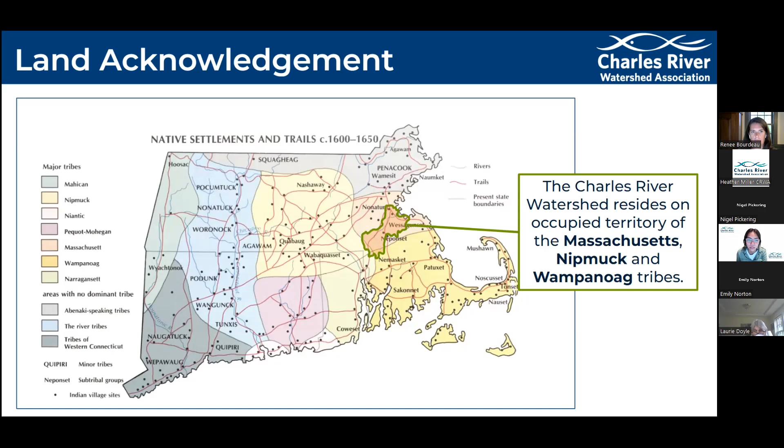Just a quick overview of our agenda. We'll be covering background on our organization and the I-90 project. Then GeoSyntec will be presenting on the flooding and environmental impacts analysis for each of the alternatives presented in the NPC. We'll end with a Q&A and how you can submit comments to MassDOT by next week's deadline.

For tonight, your presenters: you will have me. My name is Deirdre Haniff. I am Charles River Watershed Association's Urban Resilience Advocate. I have a bachelor's and master's degree in environmental science and specifically have done research in the field of freshwater toxicology.

Our second speaker from GeoSyntec is Renee Bourdeau. She is the senior engineer with GeoSyntec, a registered professional civil engineer with 16 years of experience in watershed and municipal planning and design, as well as land use master planning, environmental permitting, and design of stormwater management controls, with a focus on low impact development and green infrastructure techniques.

A little background on us. Charles River Watershed Association is one of the oldest watershed organizations in the country. We were founded in 1965 by a group of residents who did not accept that the Charles cannot be cleaned up. Since then, we have worked with federal, state, and local governments to protect, restore, and enhance the Charles River and its watershed through science, advocacy, and the law.

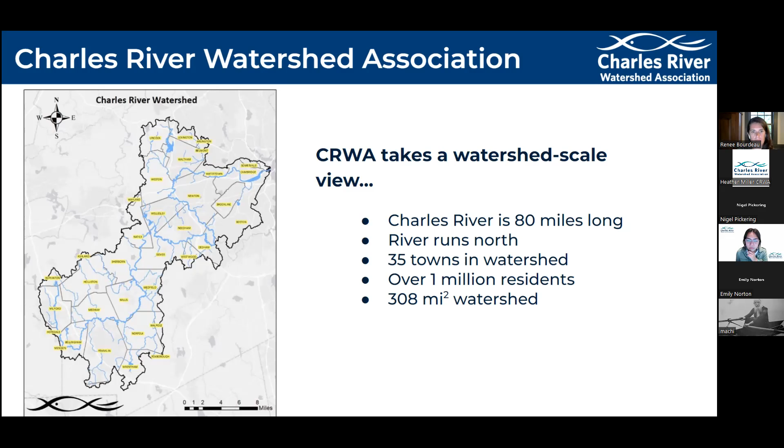Next slide. Our organization has had a long history of advocacy and projects within the watershed that supports our mission. For people in Boston, you might be aware of our advocacy during the Big Dig that led to the Zakim Bridge design. We started a flagging program which notifies boaters and recreational users in the river of the water quality for the day.

We were involved in creation of the biggest wetlands in the watershed, called the Natural Valley Storage Area. We've also been involved in the largest restoration project in Medfield and also launched a fish restoration program. All of this is just to show that we've come a long way since the dirty water days, but there is still a lot of work to be done.

On top of the development and a new commuter rail stop, any huge improvement to this area will be improved from what the current use of the land is.

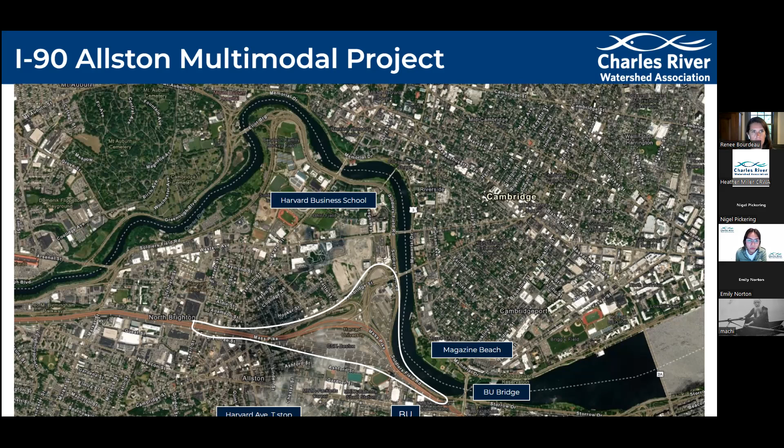A little background on what is currently the I-90 project area. Salt marshes and meadows historically buffered the Charles River, providing natural flood storage and control by storing excess water volume and also helping to filter out nutrients and pollutants. Where the water used to be in this area foreshadows some of what we'll be talking about tonight, because water is returning to the spaces it used to be in.

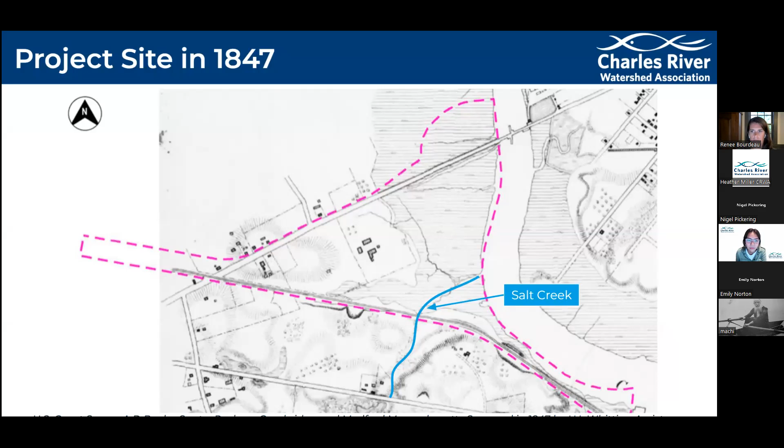That's because in developed landscapes you have a lot more impervious surfaces, your hard surfaces like rooftops, roads and buildings, that basically act like a rain jacket in our environment. This reduces the amount of green space and ground cover for water to infiltrate back into the ground, and it exacerbates stormwater runoff and flooding, which can lower water quality in the river and prevent safe recreational activities there.

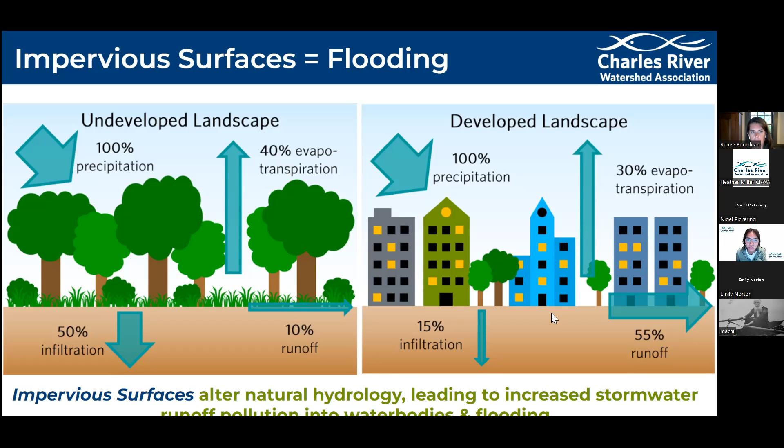As you can see today, the marshes that used to store floodwater and buffer tides at the project site are now totally impervious roadways. I've also highlighted in that project site area, in yellow, what is called the throat area, and this is what the alternatives of the project and today's presentation will focus on.

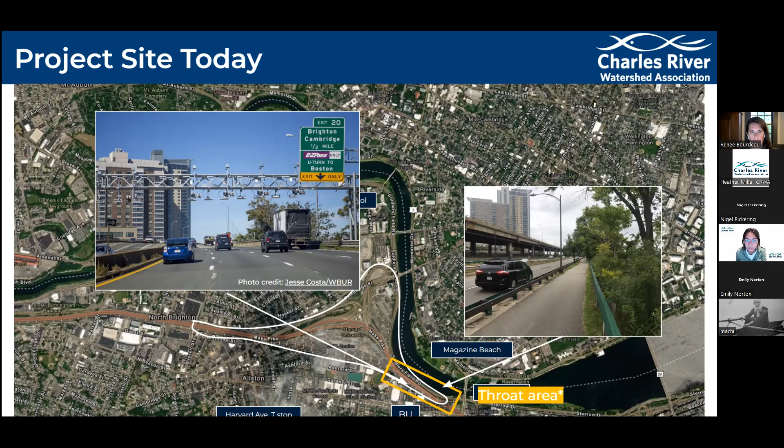While we will mainly be focusing on climate vulnerability related to flooding, impervious surfaces do more than just increase runoff and flooding. They can also create an urban heat island effect, which you can see as pockets of red on the map in the neighborhood, a result of high percent of impervious surfaces and a lack of trees and green space. So although we will be focusing on flooding, we recognize this community is also experiencing other impacts of climate change.

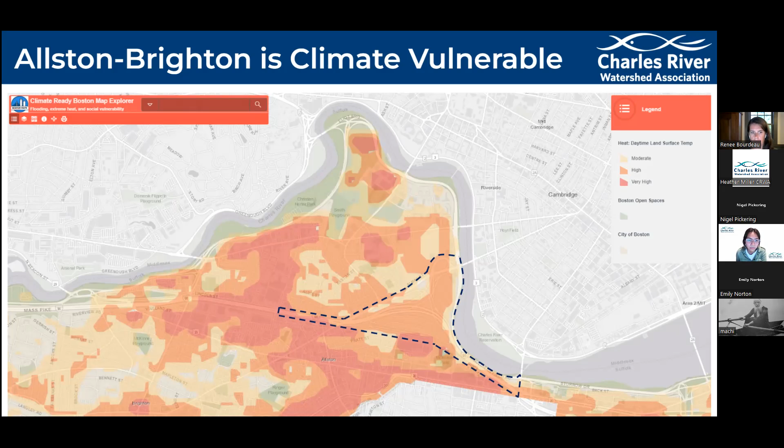We also want to acknowledge that the community is incredibly diverse. It is an environmental justice community with many socially vulnerable groups. This neighborhood currently lives with the construction of the Mass Pike and Soldiers Field Road, which have disconnected the community from the river. So improving connectivity is, and should be, an important conversation in this project.

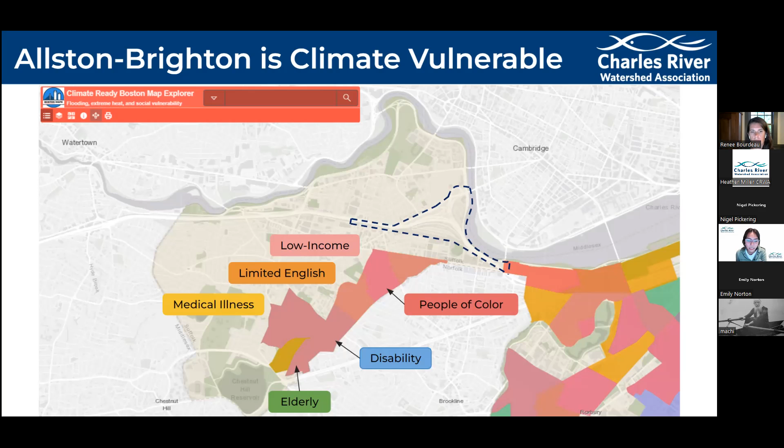The current conditions of the project site, specifically near the throat area, currently has bank erosion where the bike path is. There's trash flowing and flying towards the riverbank and clogging some of the pipes there. There is also currently low connectivity for pedestrians, bikers, and residents from the Allston-Brighton neighborhood to safely and easily make their way towards the river.

For us, what's really important to highlight is there's currently no stormwater treatment at the site. So right now we have an opportunity to turn this into a transformative site that will restore river health, improve connectivity, and make the river and parklands more accessible and resilient to extreme storms.

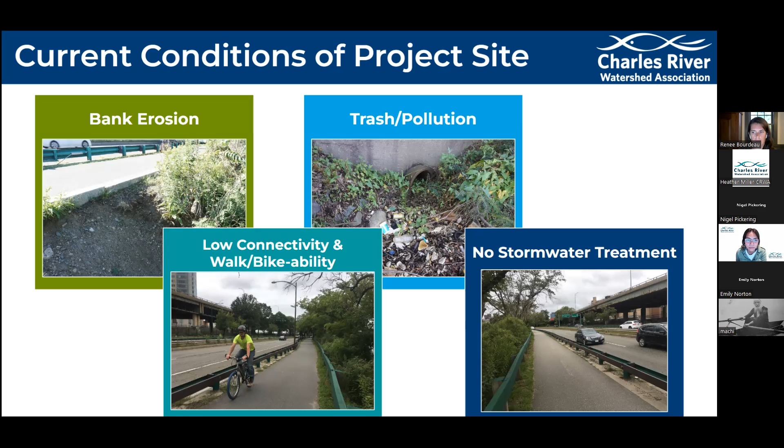Within the past 8 years, CRWA has been involved in the project. We have been members of the I-90 task force since the beginning in 2014, when MassDOT said their preferred design required putting a temporary road in the Charles for 8 to 10 years. We, alongside the boating community and other advocacy groups, said no way. We did not just spend decades and nearly $1 billion cleaning up the Charles to then stick a road into it. So we led this No Road in the River campaign and continue to advocate for a design that does not degrade the health of the river.

As we think about this project, and as you listen to the rest of the presentation, one of the things we want to stress is that this project has been going on for 8 years. It started in 2014 when MassDOT presented the current infrastructure and stated that it needs to be fixed. We're currently still very far away from a completed project. MassDOT still has other state and federal environmental review, permitting, and design to go through, plus the actual construction period, which might be completed in 2030, maybe 2035. We don't really know at this point. And the project timeline keeps getting extended.

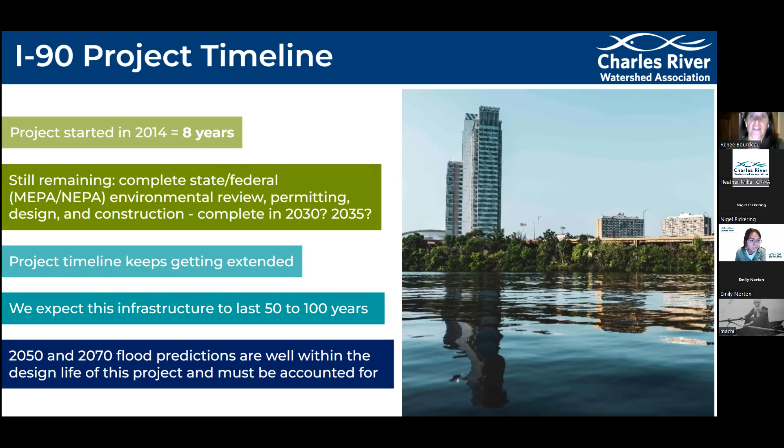As Dira mentioned, there are three design options for the throat area that MassDOT has proposed, which we're going to discuss today. I'll go into greater detail on each of these throat options on the coming slides. The first option in the top left is a modified highway viaduct. The next one is a modified at grade, and the final one is the Soldiers Field Road hybrid.

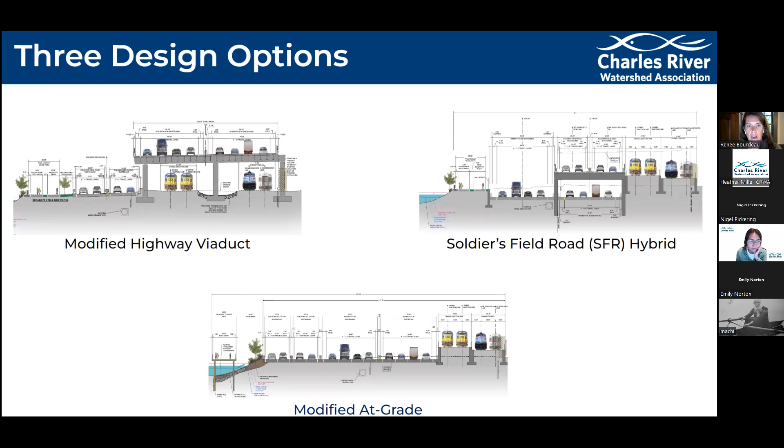The modified highway viaduct is shown here in a cross section that comes directly from the Notice of Project Change. It includes a new I-90 elevated structure to replace the existing I-90 viaduct structure, while all other transportation infrastructure remains at grade, similar to what is currently there now.

MassDOT recently made changes to the design to include a narrower viaduct, which opened up additional open space along the Charles River within the throat area. The Paul Dudley White path would provide 10-foot wide separated bike and pedestrian facilities within a majority of the throat area, and a minimum 12-foot cross section where separated facilities cannot be provided.

This option allows for pedestrian and bike connection from the Allston-Brighton, Brookline, and Boston University neighborhoods to the Charles River Reservation. The Worcester Main Line and the Grand Junction rail tracks would remain at grade, similar to their existing horizontal alignment, with extensions of the Grand Junction rail line into West Station.

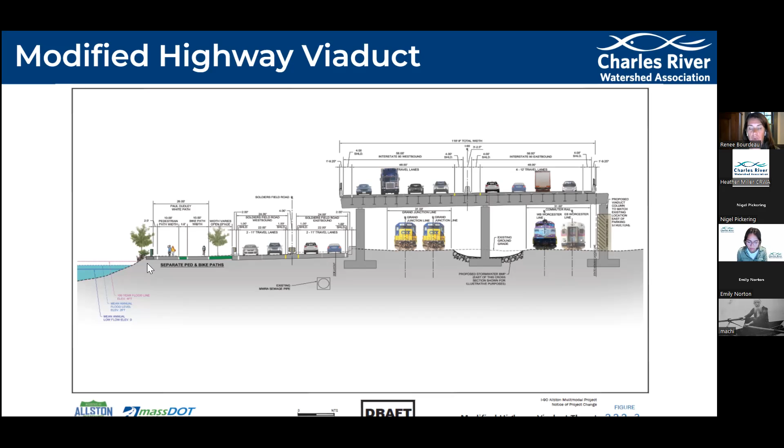The existing Grand Junction bridge over Soldiers Field Road will remain unimpacted, and the MBTA commuter rail lines would remain adjacent to the existing right-of-way line, with Boston University property to the south. Next slide.

The next option we call the modified at grade option. This is an at-grade design which proposes to reconstruct I-90 at grade or below grade to eliminate the viaduct and retain all other transportation infrastructure at grade, with the exception of a short length of Grand Junction rail track as it passes over I-90 and Soldiers Field Road after raising in elevation in a parallel alignment.

The modified at grade option allows for pedestrian and bicycle connection from neighborhoods in Allston-Brighton, Brookline, and BU to the Charles River Reservation. The Paul Dudley White path would be 20 feet wide on a boardwalk structure over the Charles River in the throat area.

Design as a modified at grade improves the visual quality for the neighborhood beyond existing conditions by removal of the visual barrier of the viaduct and providing enhanced neighborhood views. The Federal Highway Administration, or FHWA, has raised concern with this option, which we'll talk about later in the presentation, where a section of I-90 is within the 50-year rainfall floodplain, and during that 50-year rainfall event a section of this would potentially flood. So they've raised concern with that.

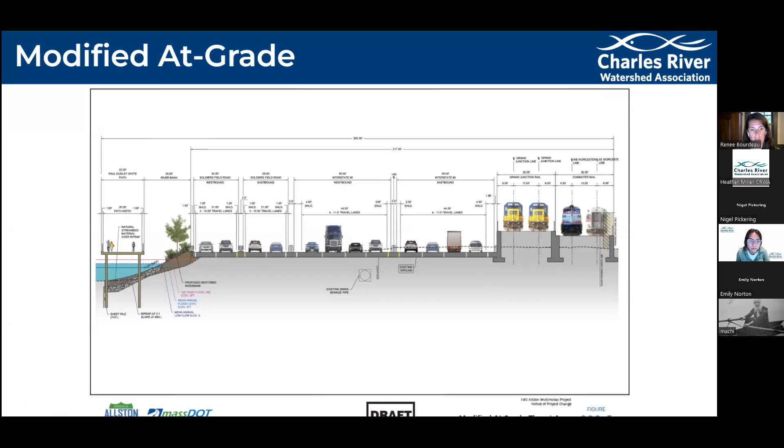The last option is a Soldiers Field Road hybrid, which we'll refer to as the SFR hybrid. It proposes to stack Soldiers Field Road above an at-grade, below-grade four-lane section of the I-90 eastbound travel lanes and shoulders. This hybrid option allows for a bicycle and pedestrian connection from neighborhoods in Allston, Brighton, Brookline, and BU to the Charles River Reservation.

The Paul Dudley White path would remain at grade, providing separate paths for bicycle and pedestrian uses. Each path would be approximately 10 feet wide, with a 4-foot wide buffer between the pedestrian and bicycle path. This option opens up almost 20 feet of new park space adjacent to the Charles River.

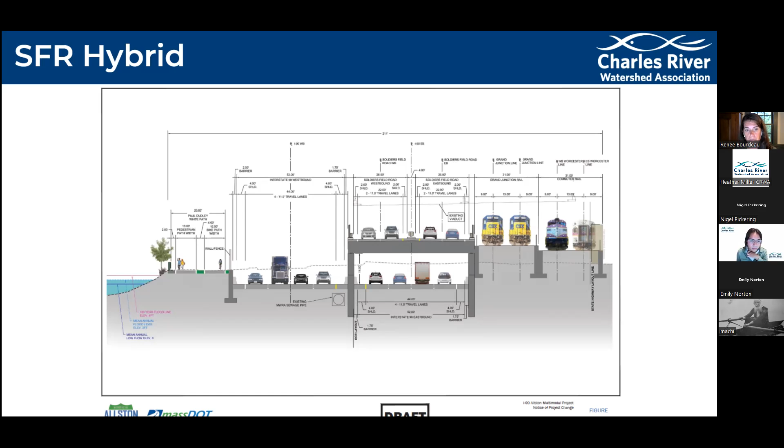Construction for this option is estimated to be the longest, at approximately 8 to 9 years, and construction staging of this option would require relocation of Soldiers Field Road and the Paul Dudley White Path over the Charles River, resulting in construction duration impacts to the Charles River, which we'll get into a little bit as we move forward here. Next slide.

These resources include online viewers regarding future sea level rise and coastal flooding predictions. We reviewed technical memorandums and reports prepared by the MassDOT team on the project, looked at MassDOT GIS for transportation, and ultimately relied heavily on the most recent document, published in July 2022, a notice of project change, including all appendices. We'll describe a lot of technical content in the coming slides, most of which is available within the notice of project change on the project website.

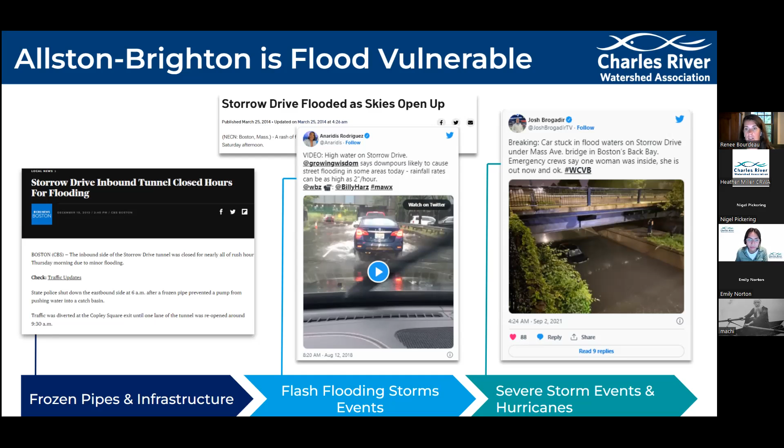Infrastructure projects like this don't come around very often. The existing viaduct was built in the 1960s, and for the past 20 years MassDOT has been talking about replacing it—that's going on 62 years. Most new highway bridges and infrastructure have a lifespan of 50 to 100 years, typically pushing the upper range of 75 to 100 years. So once this infrastructure is in place, it is here to stay and will likely see many of the future flooding impacts and climate vulnerabilities we're going to discuss today.

When we talk about flooding in the Charles River, many people simply say, well, we have the Charles River Dam, we don't need to worry about sea level rise impacts. Just a little history: the Charles River Dam was built by the U.S. Army Corps of Engineers in 1978 to replace the 1910 Charles River Dam upstream, now the site of the Boston Museum of Science. The dam controls the surface level of the river basin and its tributaries upstream, and prevents seawater from entering the Charles River Basin during high tides.

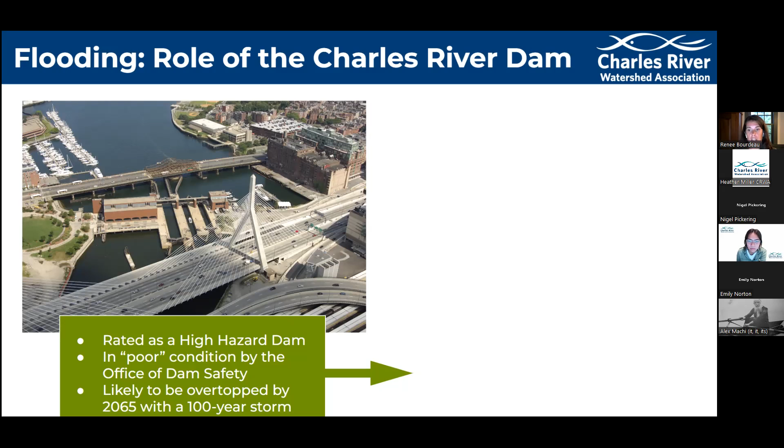Based on recent inspections, the dam is rated as a high hazard dam and in poor condition by the Office of Dam Safety. Based on recent projections and studies of coastal flooding impacts in Boston and Cambridge, the dam is likely to be overtopped by 2065 during the 100-year storm, and as soon as 2050 during the 500-year storm. The dam could be flanked as early as 2045—a mere 23 years away—under the 500-year storm, and in 2055 during the 100-year storm.

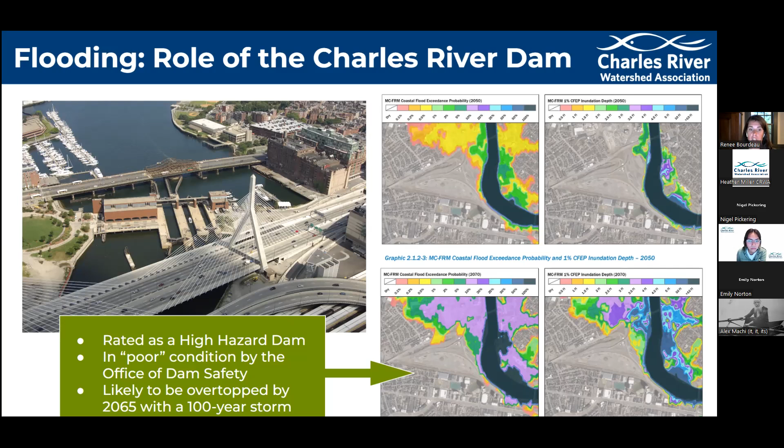All of these events are well within the 75 to 100-year lifespan of this infrastructure. Currently, the Army Corps of Engineers and Massachusetts Department of Conservation and Recreation are developing a study to assess the potential climate resiliency of the Charles River Dam. However, the results, timeline, and cost for implementation of such a project are all unknown.

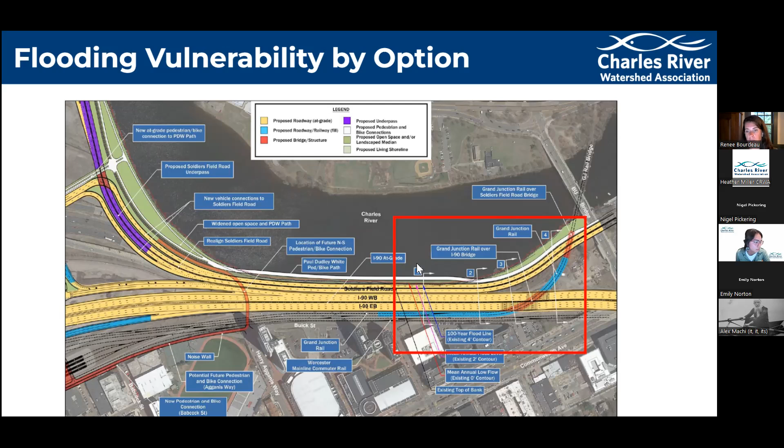Setting the stage for the next couple of slides: in the previous slide, Sarah showed you where the throat area was. In the red box here, we're going to focus on cross sections for each of the three alternatives. Section 1 is on the far left of the red box, and section 4 is on the far right, closest to the BU Bridge.

The Grand Junction Railroad and Worcester Main Line are also potentially vulnerable to flooding in 2050 and 2070, depending on the locations throughout that section. Under this build alternative, most of I-90 is not vulnerable to future flooding due to the elevated viaduct design. As we understand, this is still in conceptual design and final grading is not complete. The current layout is not expected to significantly mitigate future flooding in the northern portion of the project area, but the railways below the viaduct may provide some flood protection to the vulnerability of the BU campus, essentially acting as a wall.

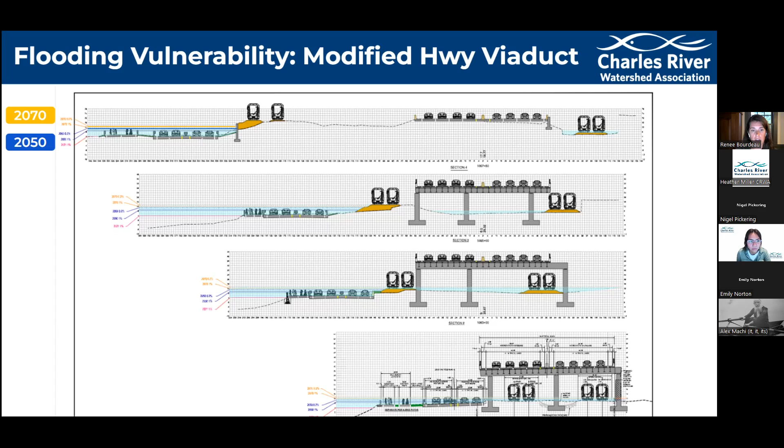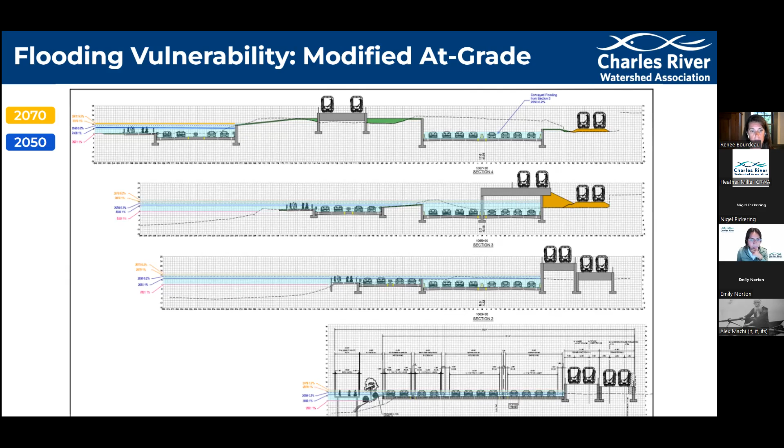Although I-90 on the eastern end is inland on an elevated landscape feature, there is potential for flooding in the western portion of I-90. In all cases, if the Charles River Dam were to be topped or overflanked, each of the throat options would have vulnerable structures and vehicular traffic underwater, making this infrastructure unusable in the future. In many of these options, we have to ask ourselves from a public safety standpoint, how does one evacuate Boston if all vehicular and train traffic lanes are inundated with water?

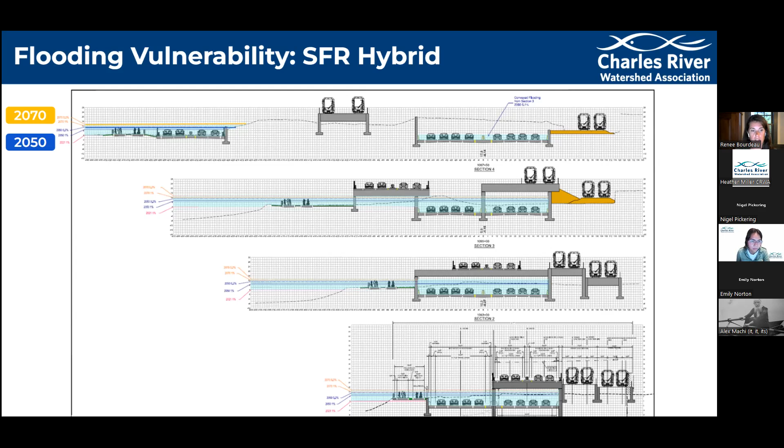Next, we're going to move to some of the impacts of Charles River health. EPA defined the Charles River as a rating of B, which is basically meeting almost all water quality standards for both boating and swimming. The riverbed has been vulnerable to algae blooms due to excessive phosphorus levels from stormwater runoff, which has become an area of concern.

The biggest concerns for future water quality are stormwater pollution and the projected extreme weather events due to climate change. EPA defines the presence of phosphorus in the river into three main categories: inflow from the upstream watershed of the Watertown Dam, non-combined sewer overflow from drainage areas and tributaries, and combined sewer overflow discharges. Resiliency to current and future weather events is key to maintaining the Charles River as a safe recreational location and ecological habitat.

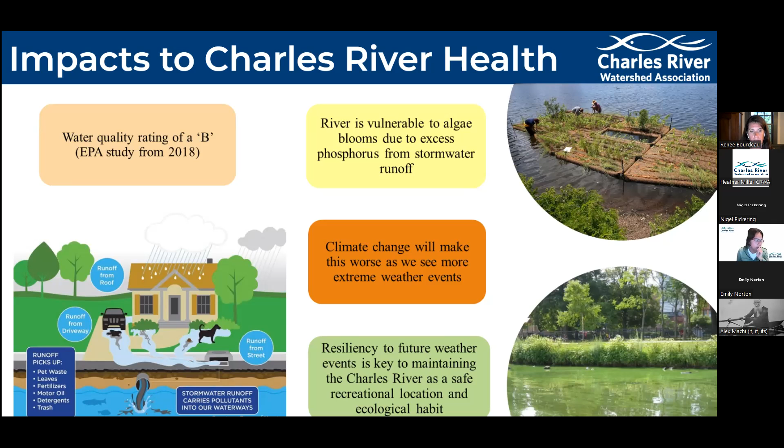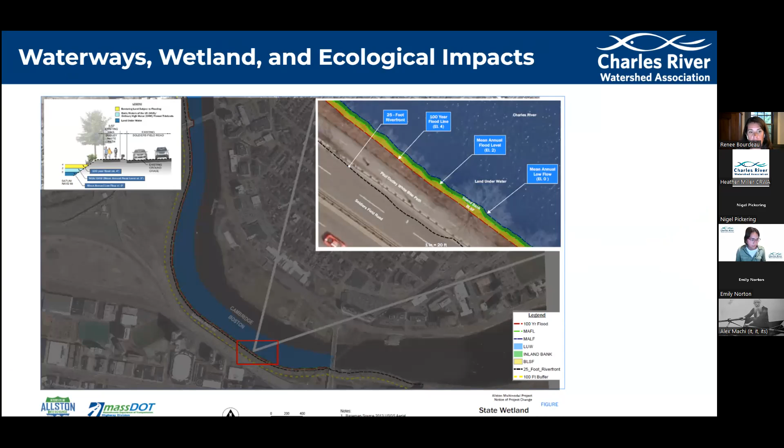For the next few slides, I'll be focusing on a few of the terms for our discussion that I want to review with you related to the wetlands, waterway, and ecological impacts. The next slide is just a zoom in of the box in the top right.

We're going to be talking, you'll hear me say words such as bordering land subject to flooding. The bordering land subject to flooding is the yellow area between the red line and the green line adjacent to the river line, and it's represented as the land when the 100-year floodplain is mapped by FEMA. This area is presumed significant to flood control and storm damage protection.

We'll also be referring to inland bank, which is the area shaded in green, which is a landform that confines the river and is typically between the floodplain and the water body.

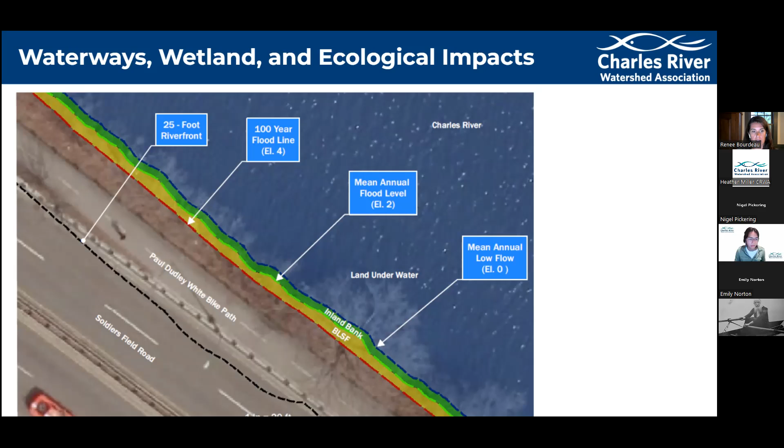For the modified highway viaduct, this is the option that's very similar to what exists there today, which is replacing the existing viaduct. There's really only permanent impacts to tidelands, primarily associated with stormwater outfalls and their associated energy dissipation that will be required. This is consistent with all three options. Basically, MassDOT is going to upgrade all their stormwater outfalls and create energy dissipation to reduce erosion along the stream bank. This is a very positive thing, and really the only permanent impact with regards to the highway viaduct option.

There'll be no permanent fill within the bordering land subject to flooding. The riverbank improvements will use native species, basically trying to recreate a riverbank consistent with what existed prior to development. There'll be no permanent impacts to navigation associated with the modified highway viaduct option.

Again, there's permanent impacts to tidelands from the outfalls, consistent with all three options. The walkway and the piers associated with that will have permanent impacts to the river. There'll be 500 square feet of land underwater and 200 square feet of impacts to that inland bank.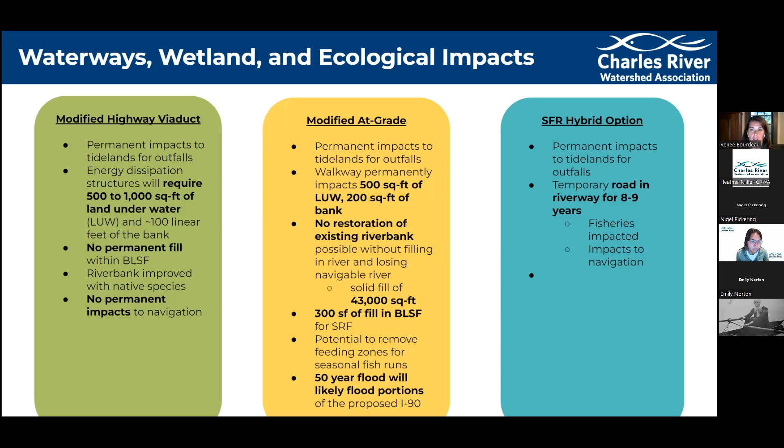For the open space and potential recreation impacts, again, we'll talk about the three options. In the green box is the modified highway viaduct option. For open space and recreation, there'll be permanent impacts from the I-90 piers, associated with 500 square feet of permanent impacts. Additionally, from the overhang associated with the viaduct, there'll be indirect effects on 4,900 square feet of parkland through the overhang. This is currently inaccessible parkland.

However, this option will create 4.5 acres of new parkland, and the Paul Dudley White pathway would be widened. We've included a little Fenway Park graphic - some of it's being cut off - to demonstrate in the non-shaded area how much new parkland would be available under each option.

In the yellow box, the modified at grade option - the Paul Dudley White pathway would be relocated into the Charles River, which would remove 1 acre of recreational water. 1.3 acres of permanent parkland would be converted to highway, and 3.6 acres of parkland would be created through the removal of the Houghton Chemical land and addition of the boardwalk. So this would have about 3.6 acres of creation, which would be about 43% of Fenway Park.

And finally, in the blue box for the Soldiers Field Road hybrid option, 1.5 acres of parkland would be occupied from relocated highways, and 4.2 acres of water sheet - again, this is a water surface - would be temporarily impacted due to the construction period, at which point the Paul Dudley White pathway and Soldiers Field Road would be temporarily located over the Charles River. However, this option does have the greatest impact with additions of 6.1 acres of new parkland, or 72% of Fenway Park.

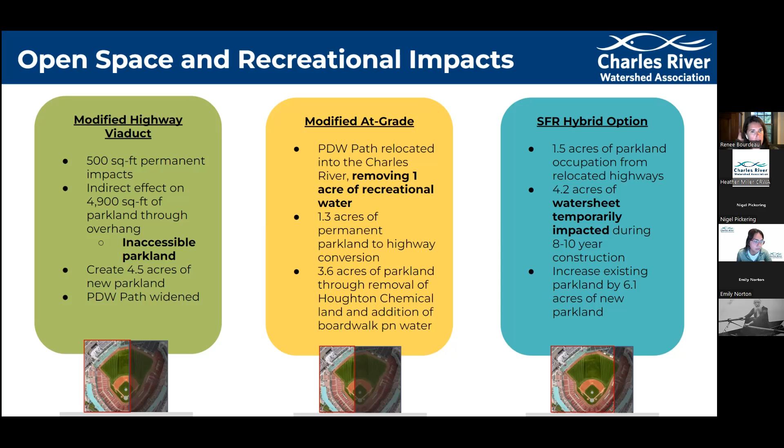Next slide. We're going to move to talk about stormwater management.

The project qualifies as a redevelopment project under the Massachusetts stormwater standards because it results in an overall decrease in impervious cover under proposed conditions. This includes the throat and the area outside of the throat, which we're not talking about in great detail today. General stormwater treatment used for the project prioritizes the use of low impact development or green infrastructure, including rain gardens and bioretention areas, and uses larger treatment practices to meet peak rate attenuation, recharge, and water quality treatment with a focus on phosphorus, nitrogen, metals, pathogens, and total suspended solids.

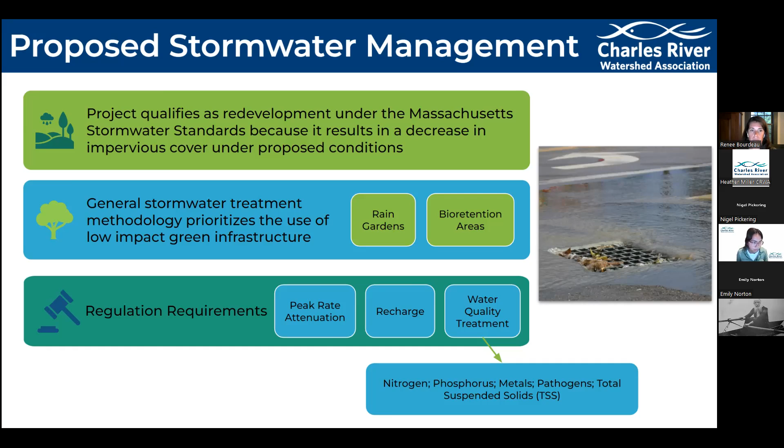Next slide. So again, we're going to focus on the 3 options, and we're going to go into detail with what is provided from a stormwater management perspective for each of these options. You'll notice some color shading on your screen, which is associated with different proposed practices, but what you should really be focusing on is the pink shading that represents untreatable impervious pavement. You'll see as we go through these options how that changes.

For this option, you can note that the proposed team treats 97% of the impervious area within the throat. So there's very little pink area. They've created more open space on the riverside, resulting in a greater opportunity to treat stormwater in the throat area. Stormwater treatment basins along the eastern edge of the throat area between the Grand Junction rail line and Soldiers Field Road will treat runoff from Soldiers Field Road.

The basin is proposed as either bioretention or infiltration basin. Rain garden planters are also proposed within the park to treat stormwater runoff from the Paul Dudley White pathway. Stormwater runoff from I-90 would be treated underneath the viaduct in an infiltration swale.

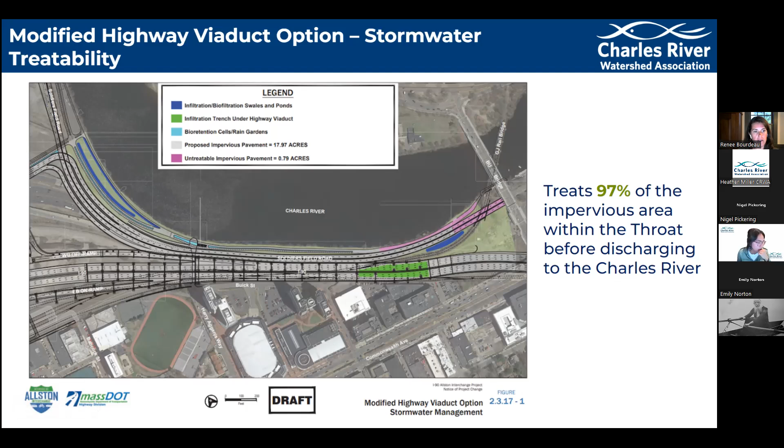Next slide. Again, just refreshing everyone's memory, the pink area noted on the slide represents the untreatable impervious pavement. This is a modified at-grade option, which would allow treatment of stormwater runoff from Soldiers Field Road at a new bioretention infiltration facility located at the eastern edge of the throat area between the Grand Junction rail line and Soldiers Field Road. Given the proposed cross-section of the throat area for this option, there is no space available to add rain garden planters for the path system.

The proposed profile and grading of I-90 for this option precludes the opportunity to treat stormwater runoff from the interstate roadway, having it be all at grade. So the modified at-grade option would require pumping to drain the I-90 roadway because the drainage system would be below the elevation of the Charles River. This option would provide approximately 35% treatment for the impervious area within the throat section. For comparison, if you remember, the previous slide was 97%.

Next option. For the Soldiers Field Road option, this would create enough open space in the throat area to provide stormwater treatment for runoff. Again, the pink area, for everyone's reference, is the untreatable impervious area associated with the project.

Similar to the modified highway viaduct option, which is our first option, rain garden planters would be designed to treat path runoff from the Paul Dudley White Path, and a bioretention and infiltration facility is proposed to treat runoff from Soldiers Field Road. The proposed profile and grading of I-90 for this option precludes the opportunity to treat stormwater runoff from the I-90 roadway. This option again would require pumping because the drainage system would be below the elevation of the Charles River. This hybrid option treats approximately 52% of the impervious area within the throat section.

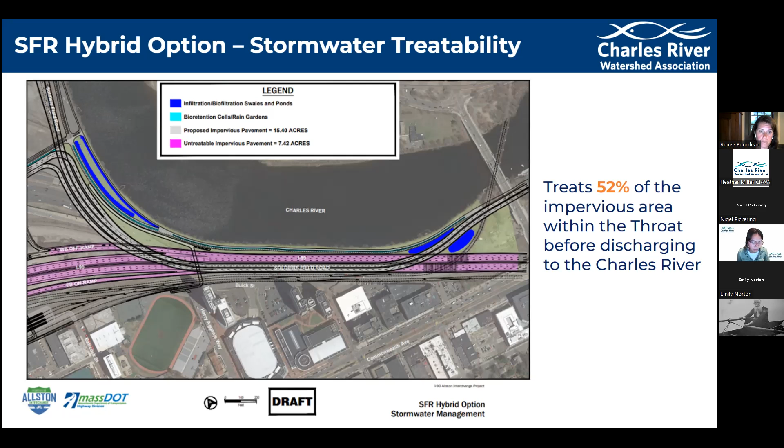As a summary of the proposed build alternatives, the modified highway viaduct provides the greatest opportunity for water quality improvement with a treatment of 97% compared to the other options. The modified at-grade and the Soldiers Field Road hybrid options are more costly than the modified viaduct option because they both require stormwater pumps. Next slide.

So we want to talk about some potential impacts on human connectivity to the Charles River. All the throat options have a very similar connection to the river over Soldiers Field Road at the new development site. Questions to ask yourself include: is your view from Allston really connecting you to the river if you can see cars in front of the Charles? Is a footbridge easier and more ADA accessible than at-grade walking? Is road noise more connecting than nature and having easy walking access to the Charles?

When we consider each of these options, whether all the transportation is at grade, many people say, well, it's not a visual barrier anymore having the viaduct. However, you should consider whether the trade-offs associated with the environment are worth it for all of these other considerations.

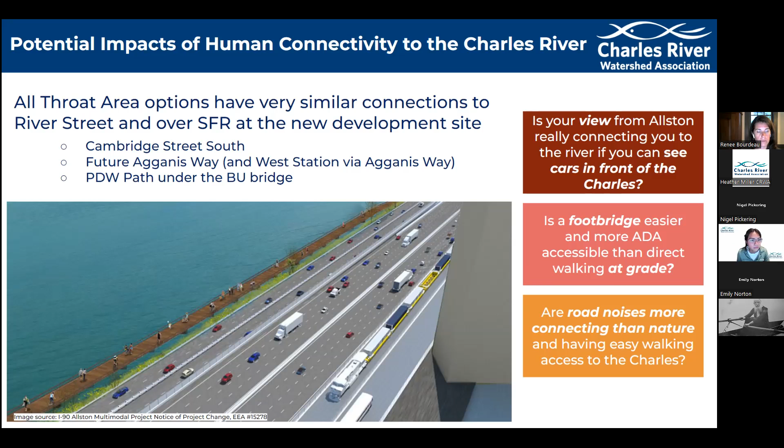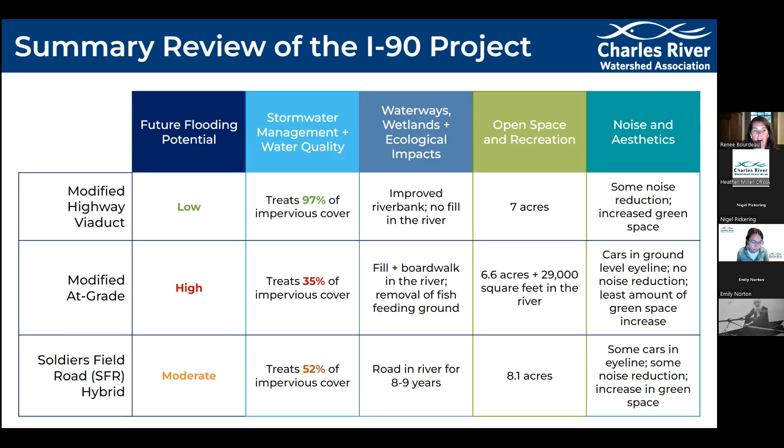Due to some time constraints here, I'm going to skip on to the next slide.

Opportunities: how do we move forward, and what opportunities does MassDOT have to create more resilient designs to flooding? One option is to elevate the roadways or the Paul Dudley White Path to be less exposed to future flooding. Number two is to build a flood barrier between the roadways. Number three is to increase elevations of the landscape elements.

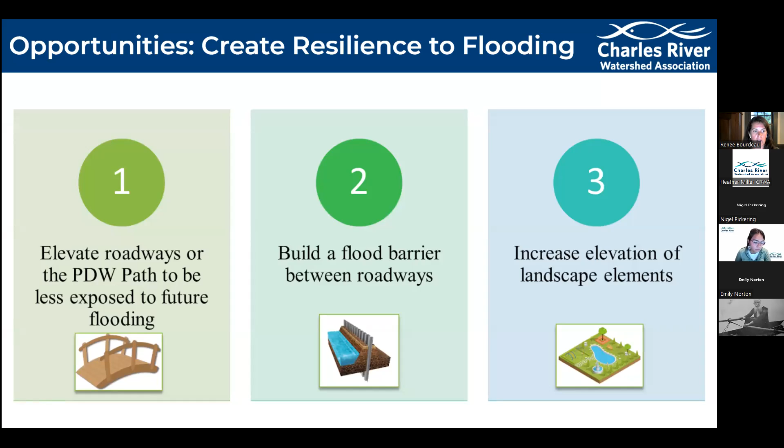Opportunities to maximize treatment of stormwater runoff from the site: we can increase green and pervious areas, providing additional locations where we could treat stormwater runoff. For sites where we need to pump stormwater, are there opportunities to pump it through a BMP prior to discharging to the river, to provide water quality treatment for all those areas we saw in pink? And ultimately, allow no temporary roads to be built over the Charles River.

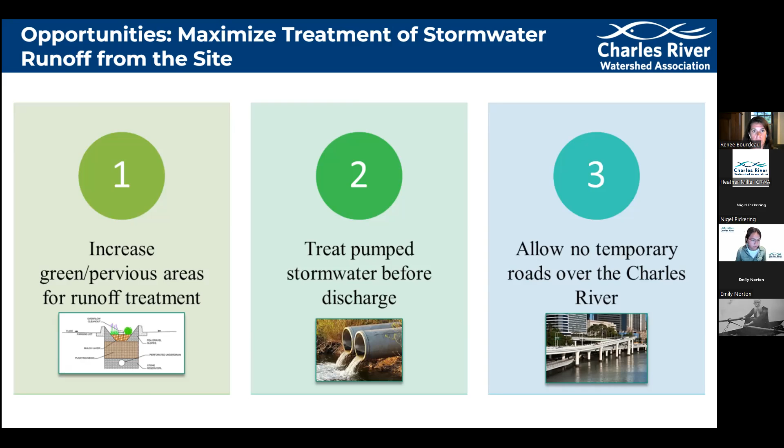Additional opportunities to minimize construction and permanent impacts to the Charles River: we're concerned about having no permanent fill impacts, so implement a throat option with no permanent fill within that bordering land subject to flooding. For impacts to navigation, the Charles River is a prized resource for the community and used by boaters daily. We need to implement a throat option with no permanent impacts to navigation in the Charles River.

The modified at grade option, as mentioned, has the most permanent impacts to water and wetland resources. We need to provide mitigation for these that will result in reduced recreational use, and select the throat option that reduces overall long-term impacts to waterway and wetland resources. For many of these options, living shorelines or a potential retaining wall would create permanent impacts to fisheries and remove feeding zones for anadromous and catadromous seasonal fish runs. We need additional details to understand the impact of these potential environmental trade-offs.

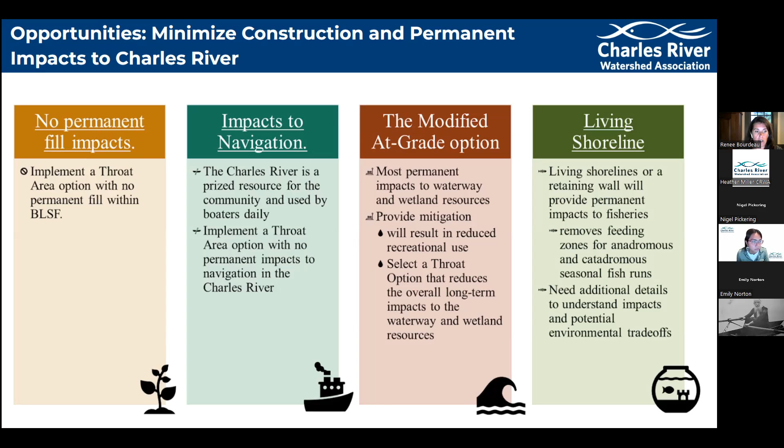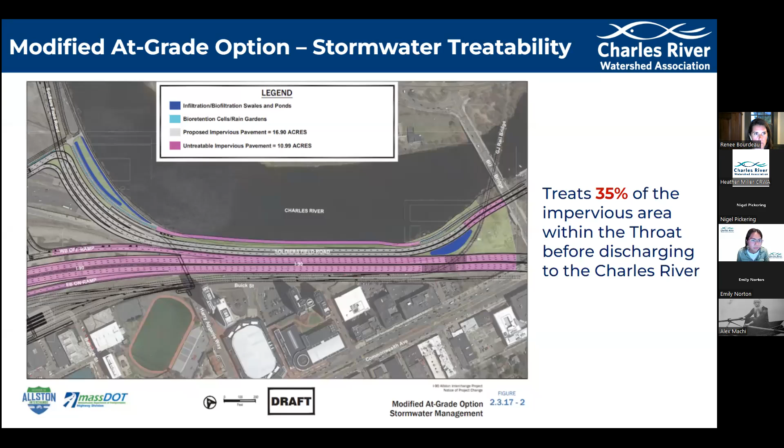Would this one work, or do you have a preference for a different slide? No, that's fine. So what was the question, just to talk about the differences between each option? Yeah, the difference between 2070 and 2050, maybe in terms of, if you have it on you, maybe how much rain we're actually getting. And so this would be sea level rise.

Yep, okay. And there's two occurrences, so there's one during the 100-year storm and one during the 500-year storm. I know it's kind of hard to see. The first blue line would be sort of the 100-year storm, and the second would be the 500-year storm. When you look at these, there's minor differences in elevation associated with each of these.

I think with regards to things to focus on, when you look at the blue line, you can look at the bottom blue line, and it might be worthwhile going to the notice of project change and actually pulling up these figures and seeing where that blue line falls under the 2050 scenario. But in most of these scenarios, especially under this one, it's well over the wheels, sometimes over the windshield of where you would potentially see flooding associated with this. And obviously the yellow thicker lines are far above that in some of these scenarios.

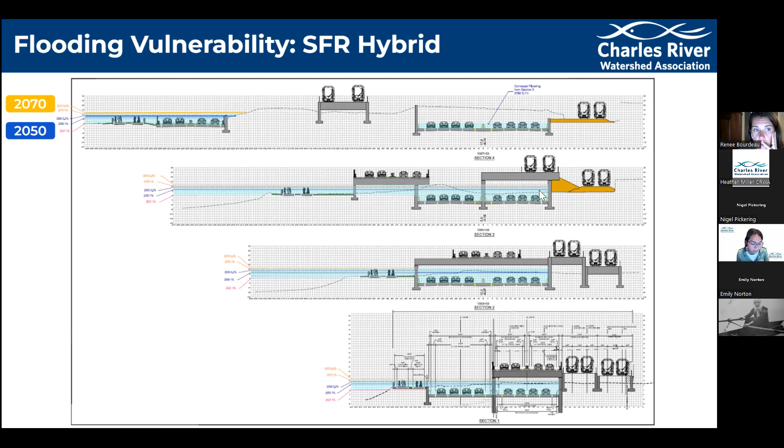So I think the big takeaway here is that really in almost all of these options, there's very vulnerable transportation corridors where there's significant flooding, where there wouldn't be able to have any vehicles located on it. In the hybrid option up here, if you look at the blue lines in section 3, which is the second one down, the vehicle is completely submerged, and you're not even at the 2050 yet. So in almost all of these scenarios for this one, at the 2050, almost all the vehicles are primarily submerged. So while there is some elevation differences between the two, using the least significant...